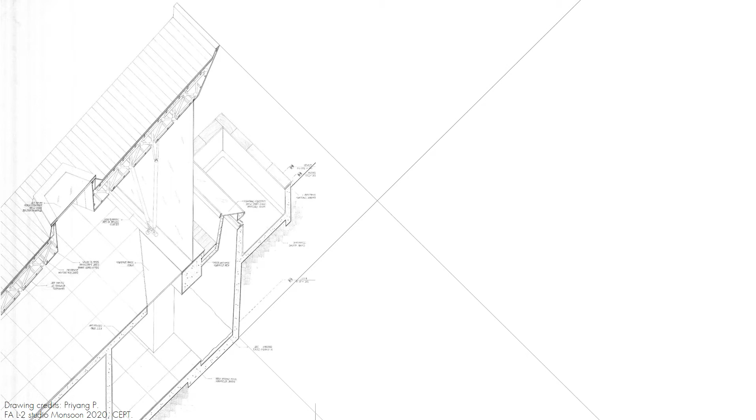The focus of the unit is constructing and specifying. As a team, we have Mehul Bhatt and Rajan Bhatt as tutors, along with myself as TA. We'll be meeting every Monday and Thursday for the coming semester.

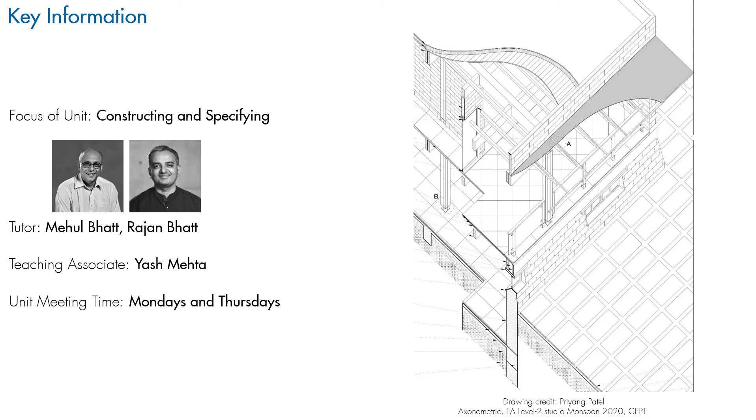This studio is a design development studio structured as a series of exercises exploring the development of a conceptual idea into a detailed design expression. It involves a journey from refinement of the idea to production of working drawings.

There are certain pre-requirements for the studio. Students should have completed at least 2 FA L2 studios, with primary knowledge and understanding of structure and construction concepts and applications. The studio projects involve works of other architects from various historical contexts, hence a good exposure to architectural history is essential.

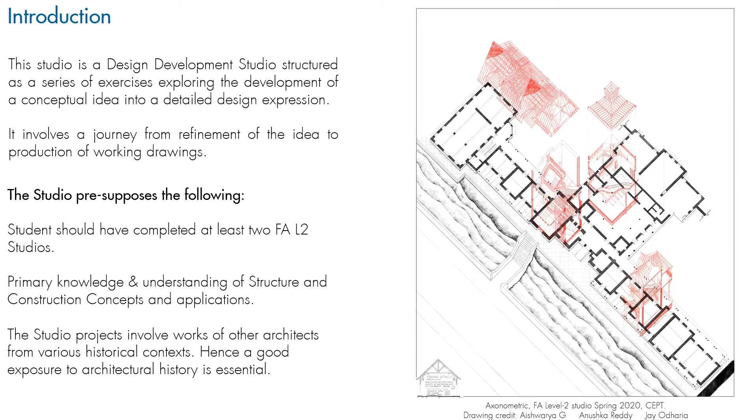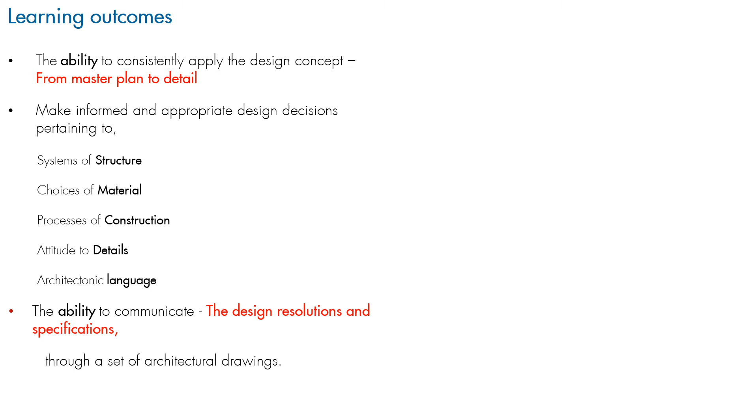Listed here are the learning outcomes from the studio: the ability to consistently apply the design concept from master plan to detail; make informed and appropriate design decisions pertaining to system of structure, choices of material, processes of construction, attitude to detail, and architectonic language; and the ability to communicate the design resolution and specification through a set of architectural drawings.

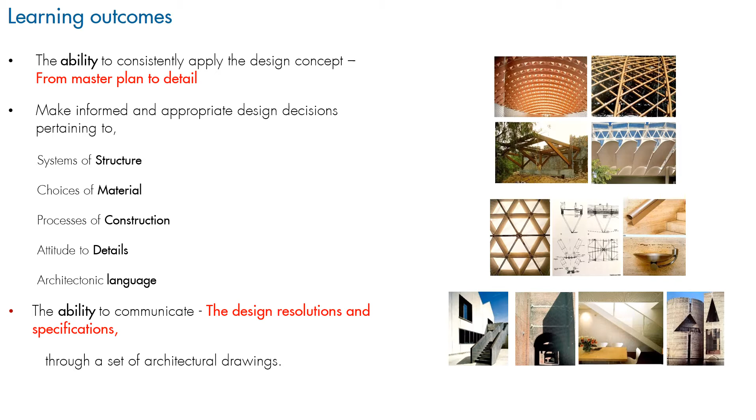The focus of the studio is to derive architectural grammar from an informed, evaluated, and considered use of structural elements and materials, environmental responses, and the issues of resources.

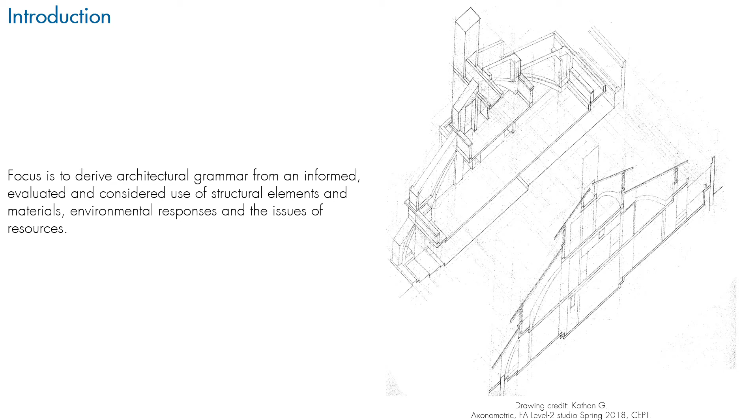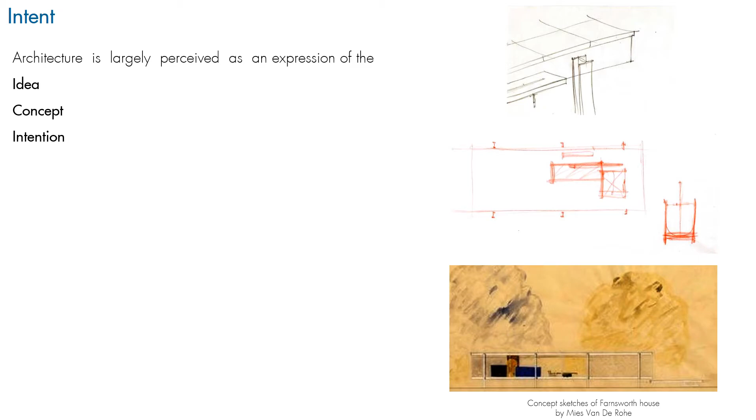Architecture is largely perceived as an expression of the idea or concept or intention. Illustrated here are the concept sketches of Farnsworth House by Mies. But its manifestation is rooted in the realities of construction and nature of materials.

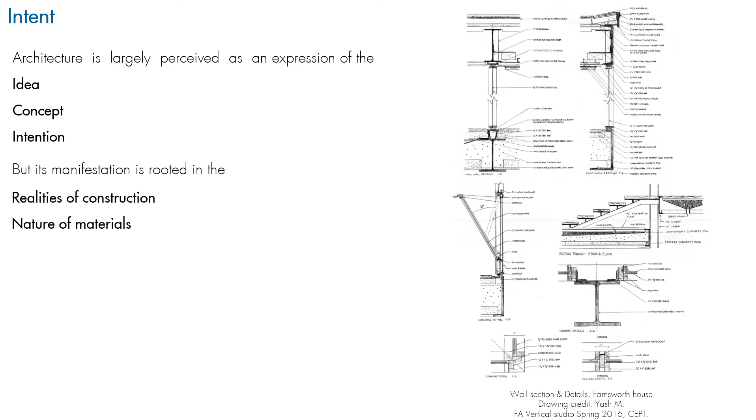Illustrated here are the wall section and details of Farnsworth House. The negotiations between these aspects result in some unique and often strange details. This studio focuses on the processes of these negotiations and communications, with emphasis on a set of buildable constructs and their own strange details. As a process, the studio involves 3 initial exercises.

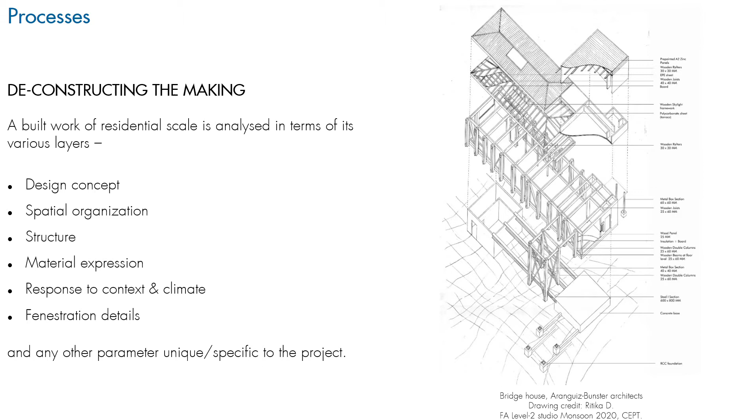Deconstructing the making is the first. It's a case study exercise of a residential scale building analyzed in terms of various layers like design concept, spatial organization, structure, material expression, response to context and climate, fenestration details, and any other parameter which is unique or specific to the project.

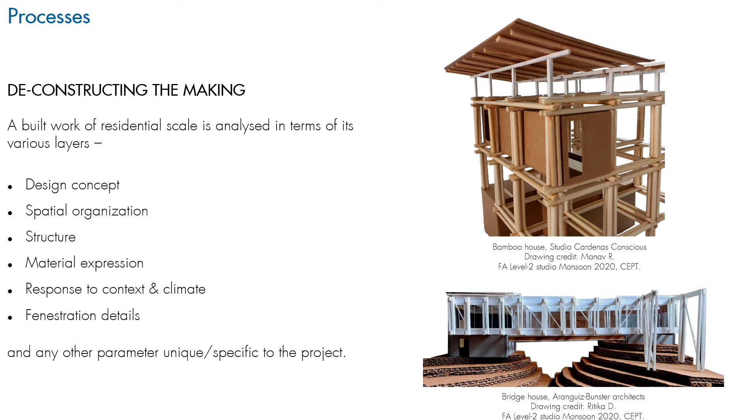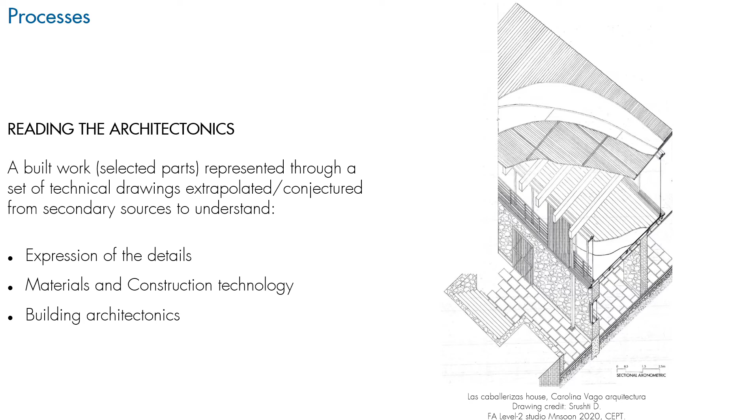Second is reading the architectonics. A selected part of a built work is represented through a set of technical drawings extrapolated or conjectured from secondary sources to understand expression of the details, materials and construction technology, and building architectonics.

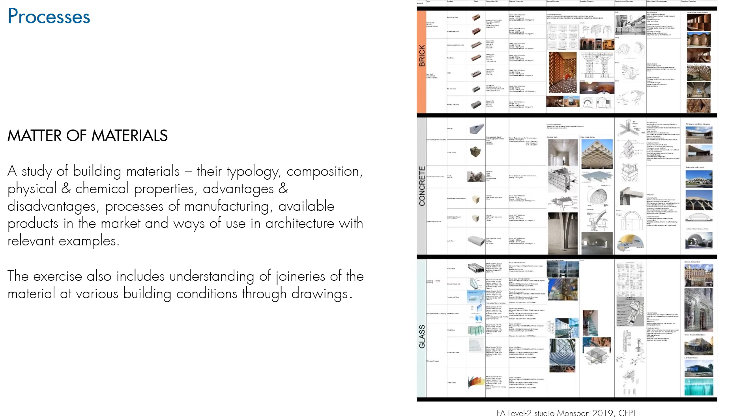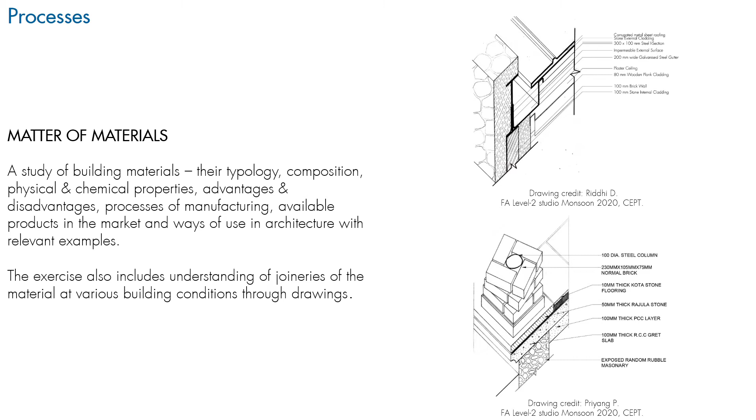Third is matter of materials. It's a study of building materials in terms of their typology, composition, physical and chemical properties, advantages and disadvantages, process of manufacturing, available products in the market, and ways of use in architecture with relevant examples. The exercise also includes understanding of joineries of the material at various building conditions through drawings.

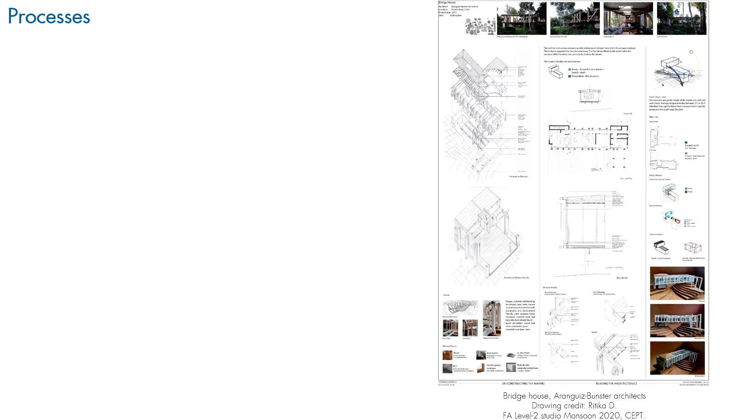Illustrated here are the comprehensive composition of all the initial exercises in the given template.

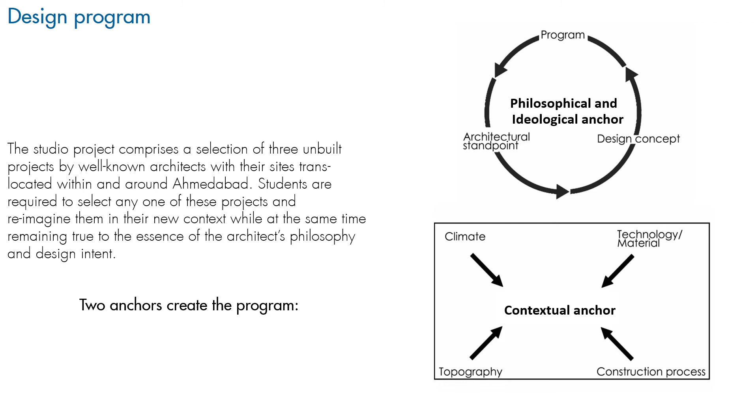There are 2 anchors which create the program. First is the philosophical and ideological anchor, which is influenced by design concept, program of the project, and architect's philosophy. Second is the contextual anchor, which is influenced by climate, topography, site, construction process, technology, and materials.

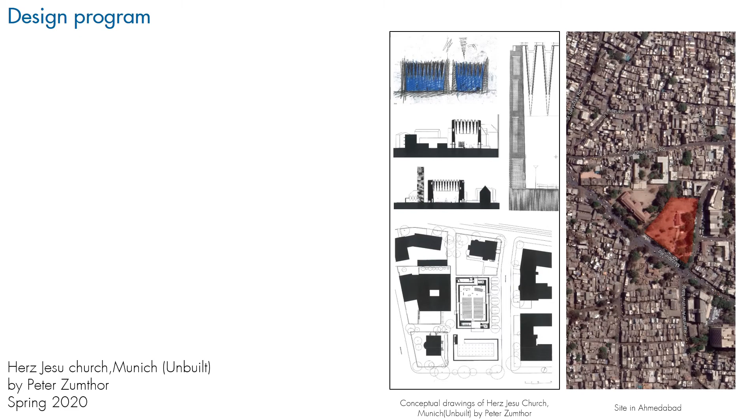Illustrated here are the conceptual drawings of Herz Jesu Church by Peter Zumthor, proposed in Munich, and site proposed in Ahmedabad. The project was selected for spring 2020 semester. These are iterations of the same project by 2 students; one can see how different they are in terms of their site response and architectonics.

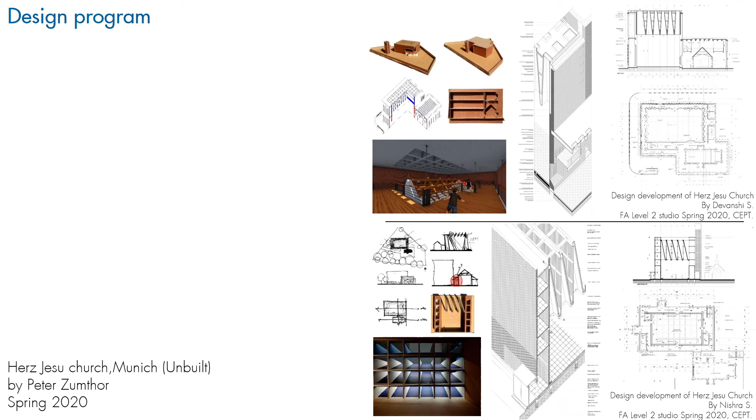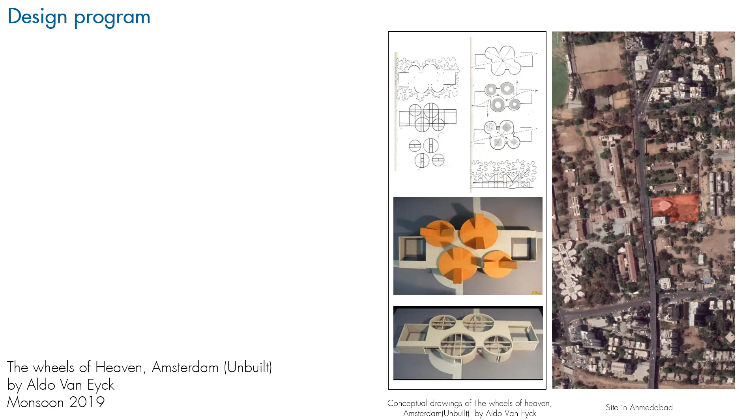These are the conceptual drawings of the Wheels of Heaven by Aldo van Eyck, proposed in Amsterdam, and site proposed in Ahmedabad. The project was selected for monsoon 2019 semester. These are two iterations of the same project by students; one can see different materiality and spatial experience.

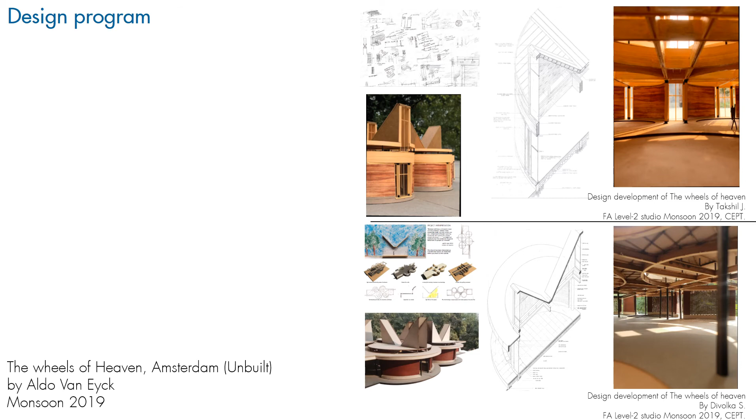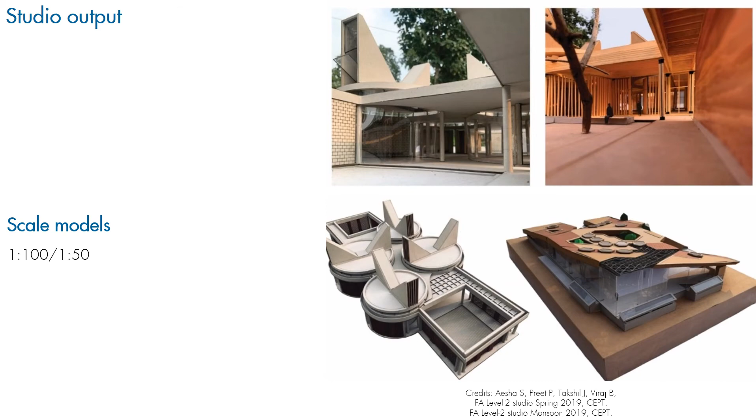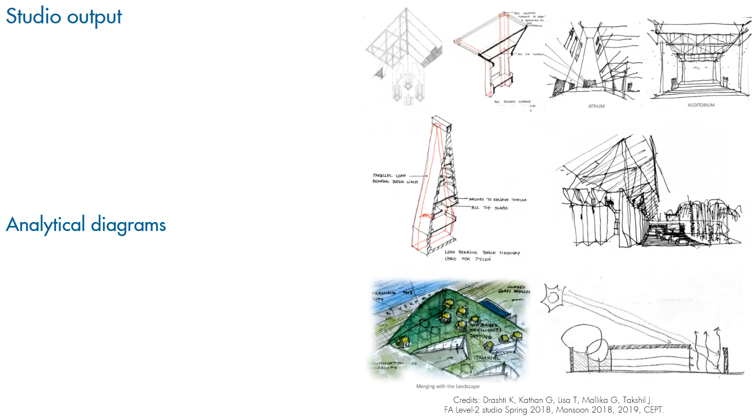Final studio output includes models at various scales: 1:500, 1:100, 1:50, 1:20, analytical diagrams, and systemic axonometry, which explains the entire structural system in exploded manner.

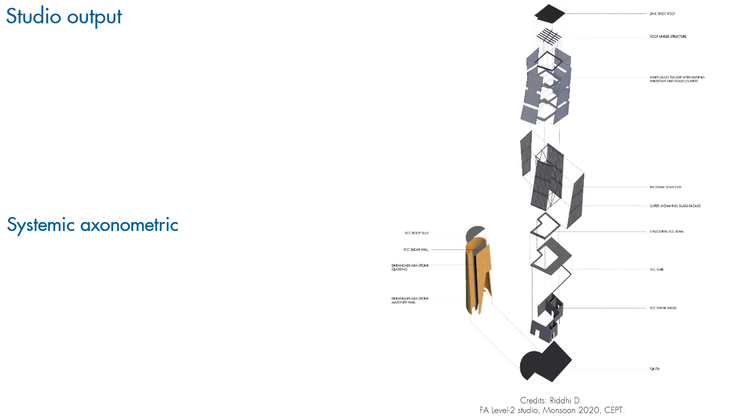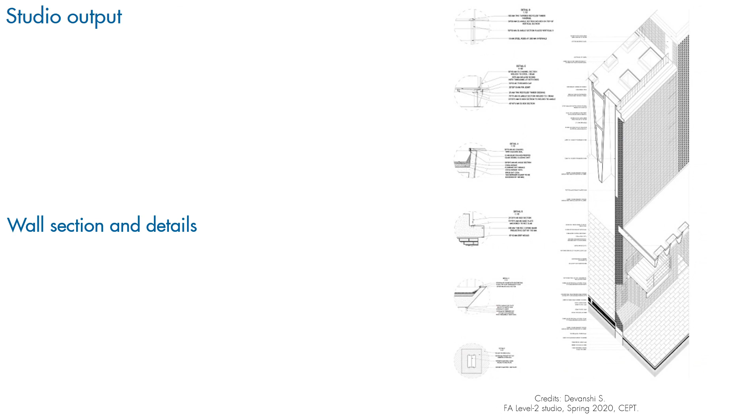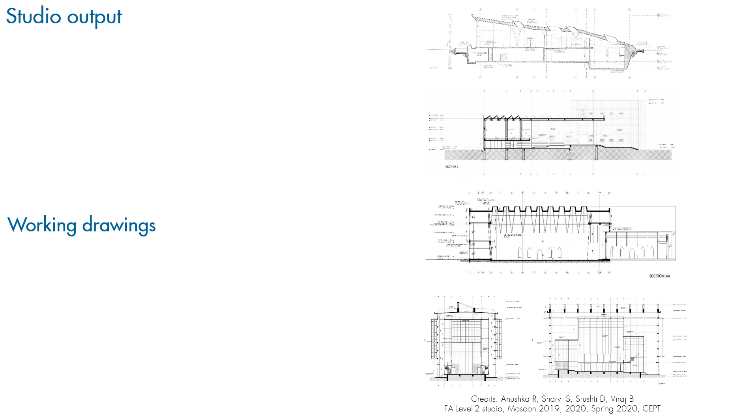Wall section and details, which includes sectional axonometry and some spot details; working drawings, general arrangement set at 1:100 scale; wall section and details at 1:20, 1:10, or even 1:5 scales; and 3D representations to convey architectural expression.